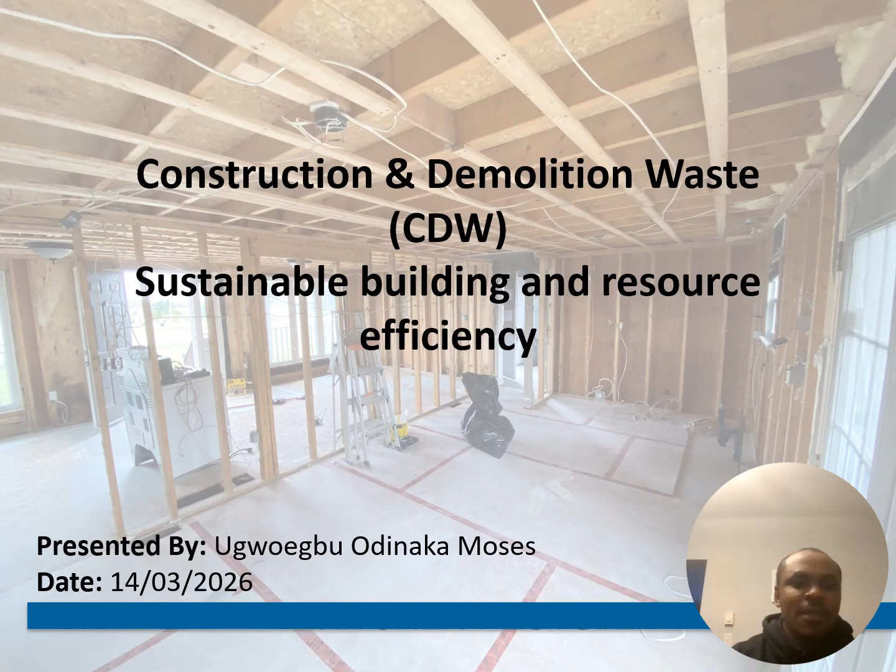I'm making a presentation today on the topic construction and demolition waste for sustainable building and resource efficiency. In this topic today, the presentation overview is as follows: sustainability challenges in construction, types of construction waste, environmental impacts, linear versus circular economy principles, Canadian construction and demolition waste data, Canadian policies and practices, future of sustainable construction.

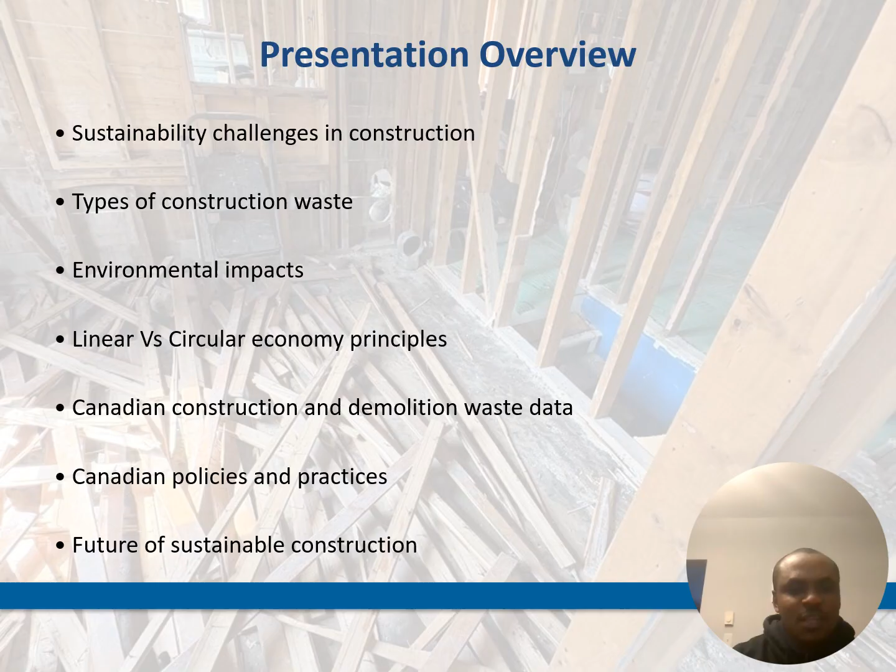This linear model has to do with extract, produce, use, and dispose, while the circular economy has to do with reducing material use, reusing materials, recycling waste, and extending building life cycles.

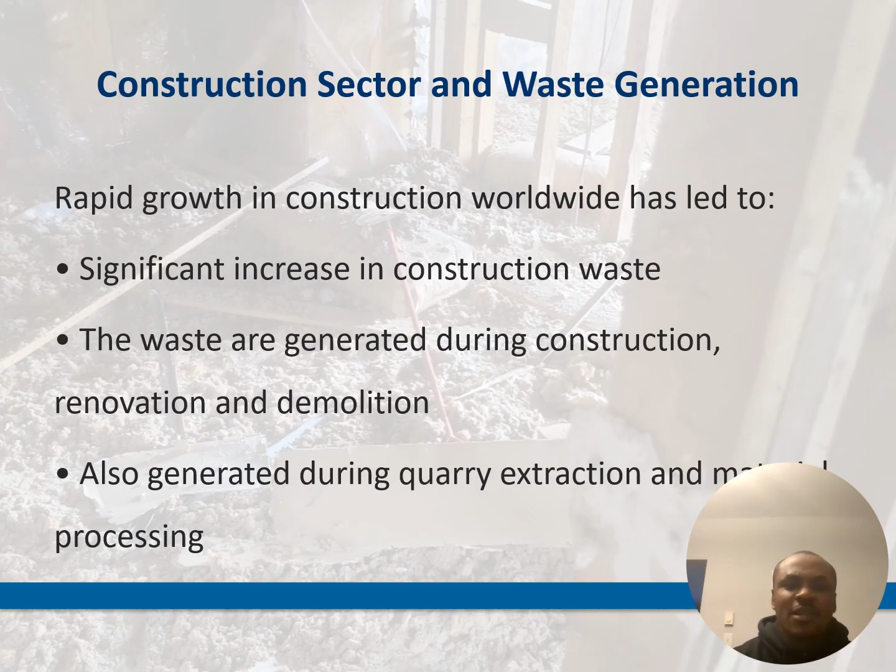When you come to the construction sector and waste generation, rapid growth in construction worldwide has led to this significant increase in construction waste. The waste is generated during construction, renovation, and demolition. It is also generated during quarry and extraction processing.

The construction and demolition waste. This includes waste generated from new building construction, renovation and rehabilitation, building repair operations, building demolition, and material extraction and processing.

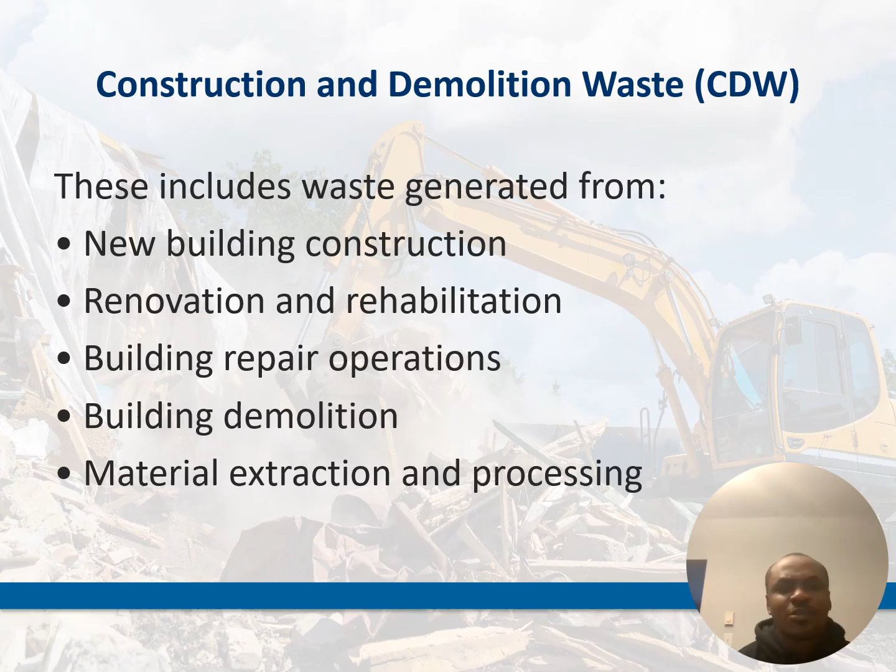When you look at the data from Canada, Canada generates roughly 4 million tons of CRD waste annually. About 20% is recycled and reused. Around 80% still goes to landfill, and improving waste diversion is a major sustainability priority for Canada.

Wastes can be classified into three, especially the demolition and construction waste. They can be classified as hazardous waste, non-hazardous waste, and inert waste. And each of these categories requires specific management practices.

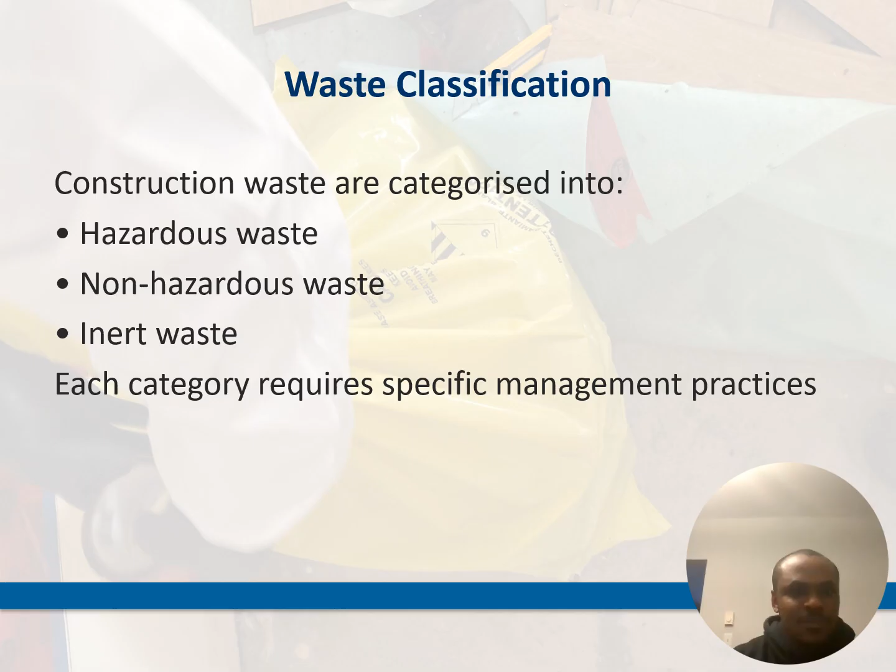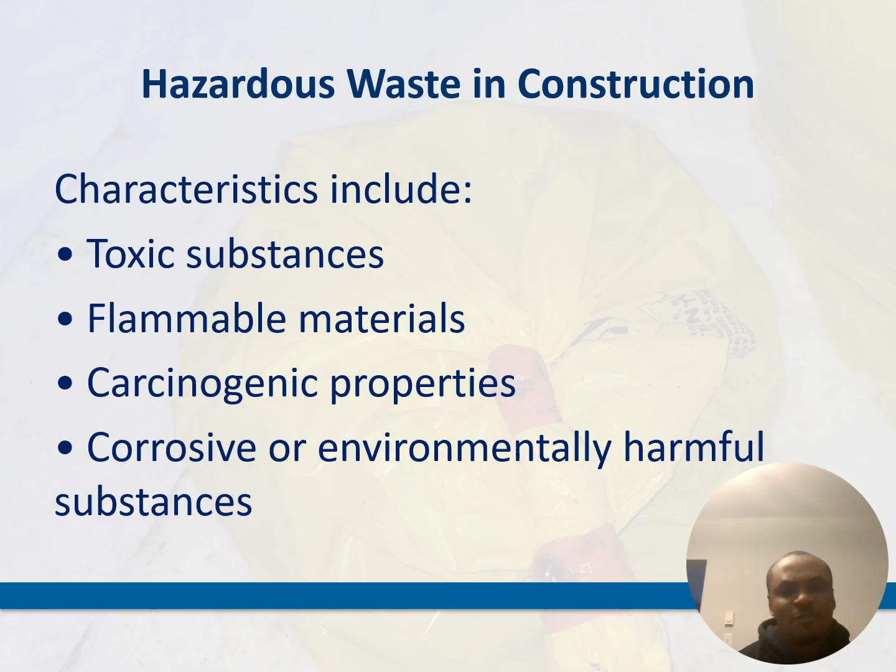For the hazardous waste in construction, the characteristics, how we know that these wastes are hazardous, is because they are toxic substances and they are usually flammable materials. Some of them have carcinogenic properties, and some are corrosive and environmentally harmful substances.

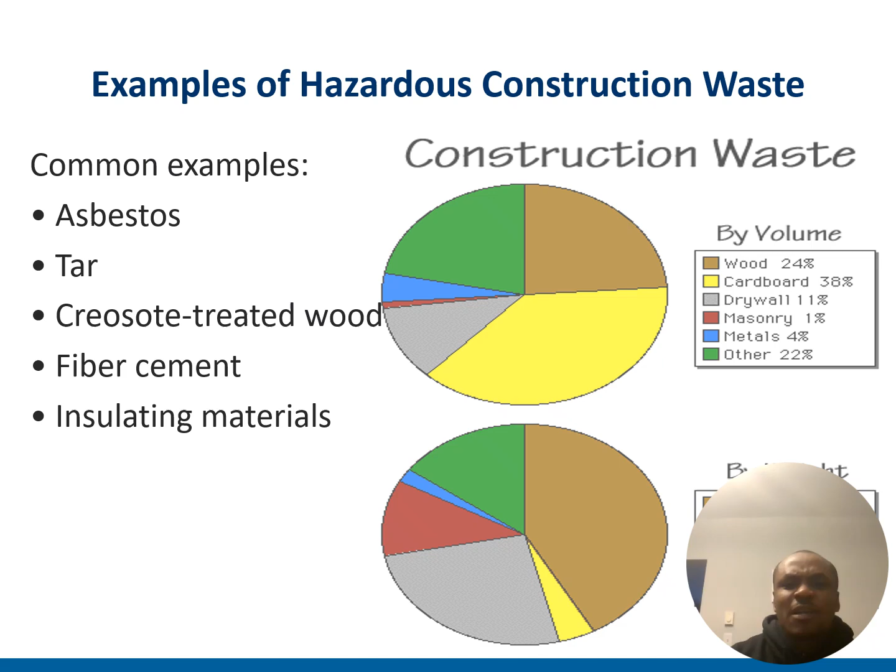These are some of the examples of hazardous construction waste: asbestos, tar, creosote-treated wood, fiber cement, insulating materials. By volume, you have wood. Wood has a percentage of 24%, while cardboard has a percentage of 38%, drywall 11%, masonry 1%, metals 4%, others 22%.

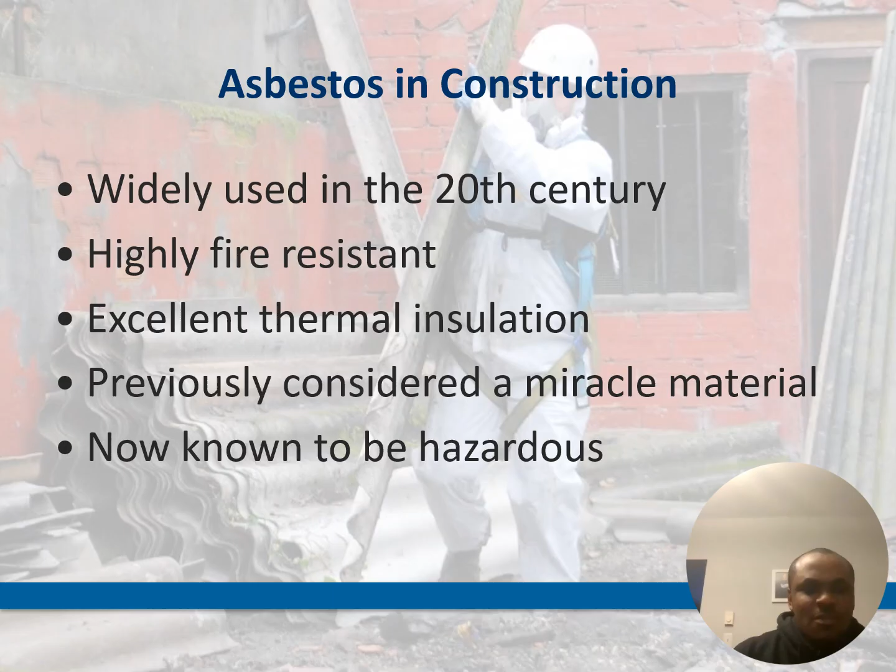Asbestos in construction. This was widely used in the 20th century, has high fire resistance and is an excellent thermal insulation, and was previously considered a miracle material, now known to be hazardous.

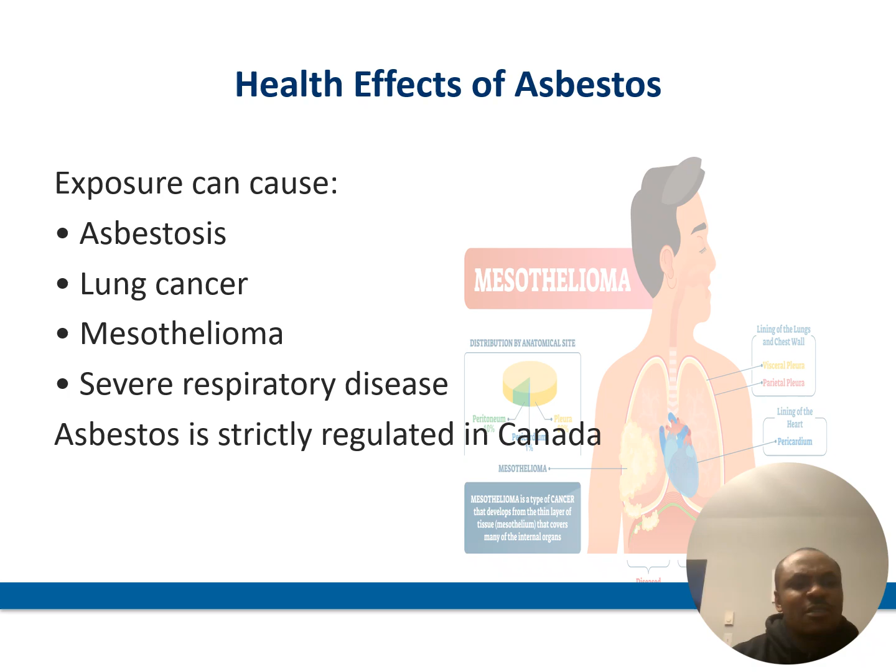Let's look at the health effects of asbestos. Exposure can cause asbestosis, lung cancer, mesothelioma, severe respiratory disease, and asbestos is strictly regulated in Canada.

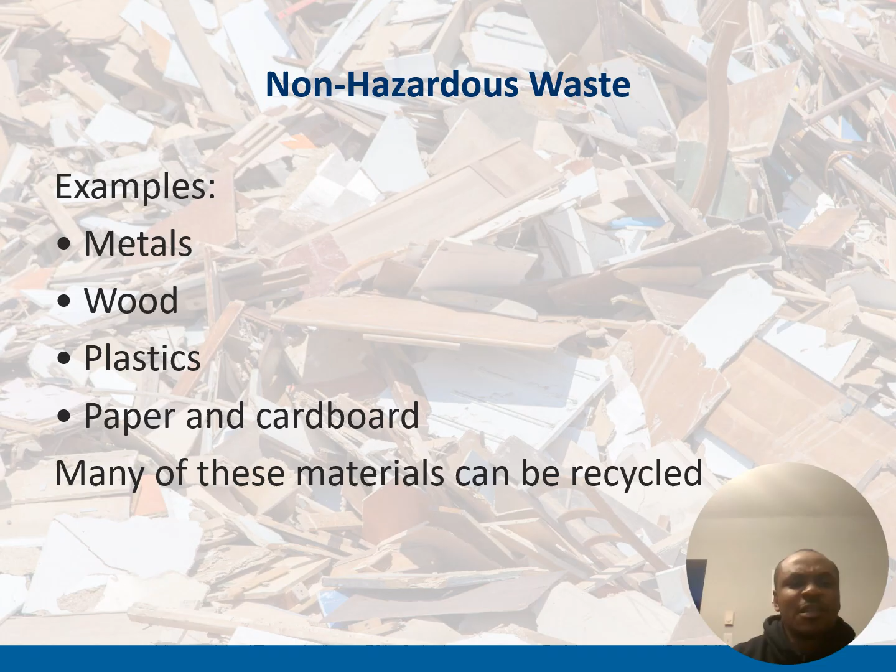Now let's look at the non-hazardous waste. Some of the examples are metals, wood, plastic, paper, and cardboard, and many of these materials can be recycled. Looking at the inert waste, these are bricks, tiles, mortar, concrete. They are often reused in road base or construction.

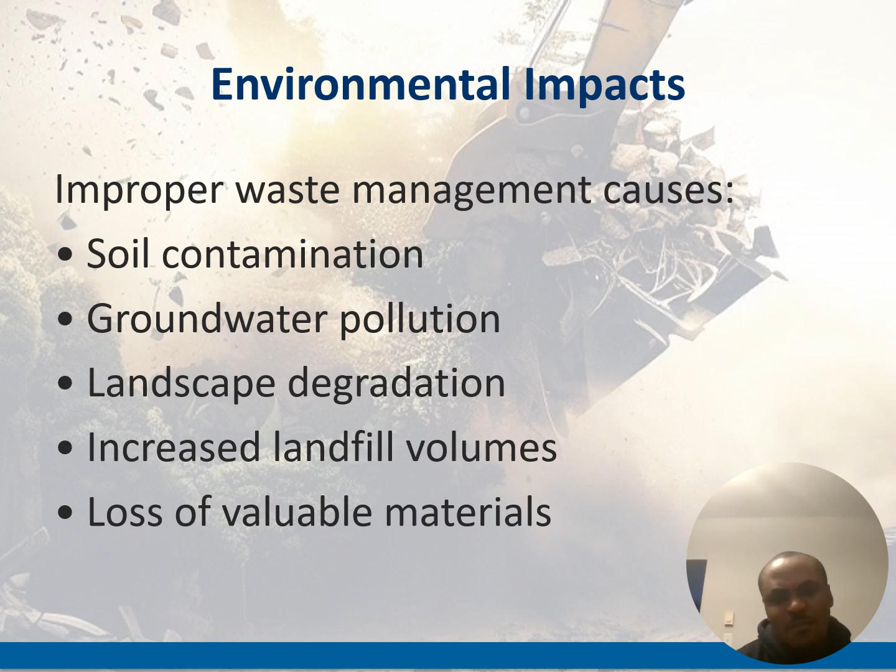Looking at the environmental impacts, this is very important. Improper waste management causes soil contamination, groundwater pollution, landscape degradation, increased landfill volumes, and loss of valuable materials.

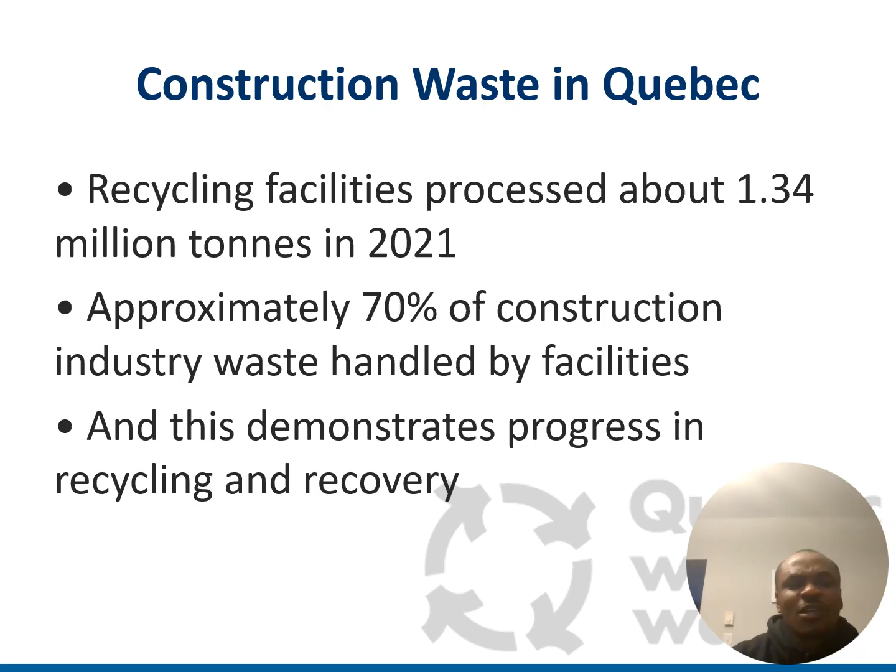And now, using Quebec as a case study, construction waste in Quebec, the recycling facilities processed about 1.34 million tons in 2021. This is approximately 70% of construction industry waste handled by facilities, and this demonstrates progress in recycling and recovery.

Now, the Canadian waste diversion policy. The government sustainability targets: federal government projects aim to divert at least 90% of construction waste, and the long-term goal of near total diversion by 2030 and increased reporting and accountability.

When you look at this data here, between 2019 to 2020 up to 2023 to 2024, we have 62% waste diversion. What is the future of sustainable construction?